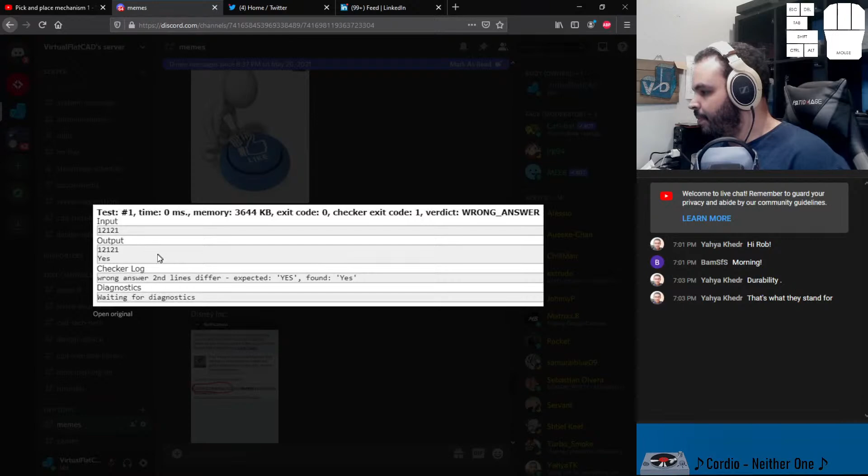When you're checking your code with an online compiler: wrong answer, second lines differ, expected yes, found yes.

Oh man, me posted a random Mickey Mouse video. Ooh, very dangerous - Disney Inc. has blocked your video in 45 countries. I think that's probably the kindest thing they could have done to you. Disney is just one of those properties that are very adamant about trying to protect their content, even though fair use exists. Also Nintendo - Nintendo's very like that as well.

When smartphone user sees a PC. Yeah, just poke the mouse, just tap the mouse.

Back in '09: when you're starting out I suggest you get an 80 gig hard drive, it should last you many years. Bro, what a meme. Oh, what a meme.

Me watching at 144p, what videos are coming out that are, what is that, 4320p? I actually don't mind 480p a lot. Yeah, sometimes it just loads faster, depends on your internet. Ha, nice.

Oh god, that is a wall of text. Alright, we'll see this one.

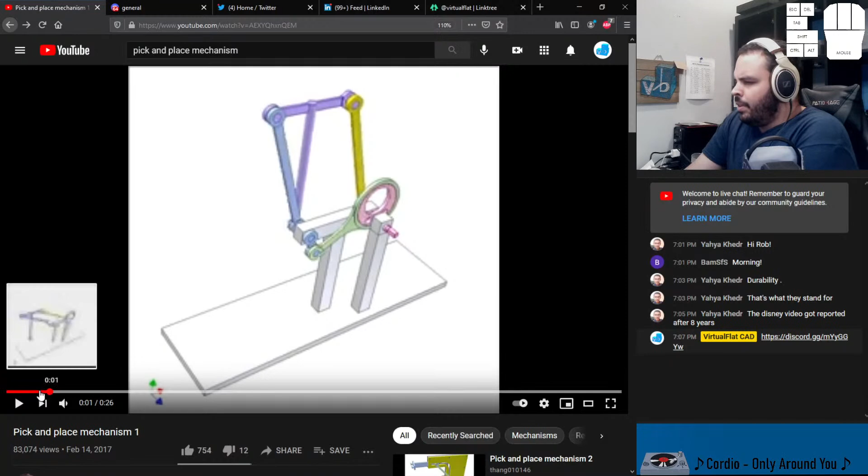But yeah, other than that, let's get started. So let's see, I want to take a screenshot of this. Maybe I'll do it just like this, and I can just do my Control Shift S or Windows Shift S shortcut to grab that. I'm going to start with that base there.

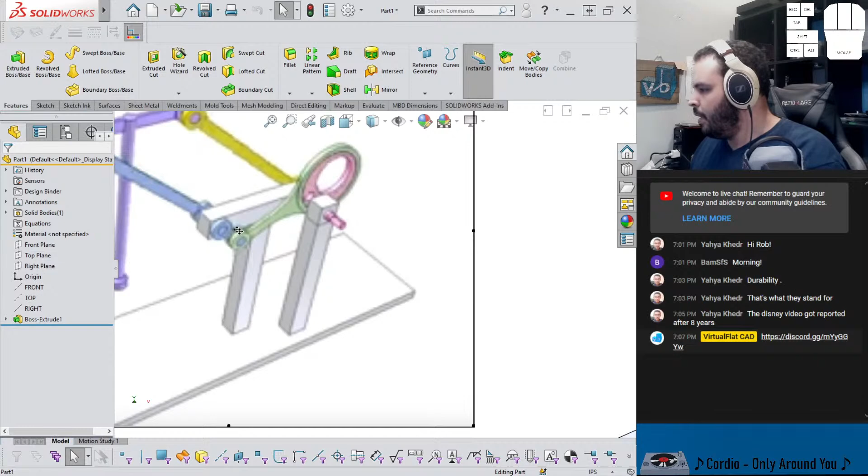Let's paste my little screenshot. So I see that there is this kind of T shape that I guess holds - it's actually the fourth bar. So there's a 4-bar mechanism here. If you haven't noticed, if I go markup, 1, 2, 3, 4, 4-bar mechanism, and this T is the ground link. So that's important to note.

The color coding is very helpful, so that I can assume is keyed to this, and it certainly does seem that way in the video. This pink member here, this pink eccentric, isn't connected to the yellow, which is why I suspect it gets two different colors. So really, it's this pink one that rotates, which moves this con rod, this connecting rod - you can call it a con rod - which then drives the blue member. The blue member then, by virtue of being connected in a series in this 4-bar mechanism, will oscillate back and forth, and then this thing out here is just basically a detail.

You could put like a robot gripper there. I might do something similar to what he has on there, where it's just, I guess that's like a suction cup or something, or just really general. Alright, so let's grab maybe, what do I want to grab?

Let me get out of markup. That'll do it. Front plane. There we go. Melektrika just showed up.

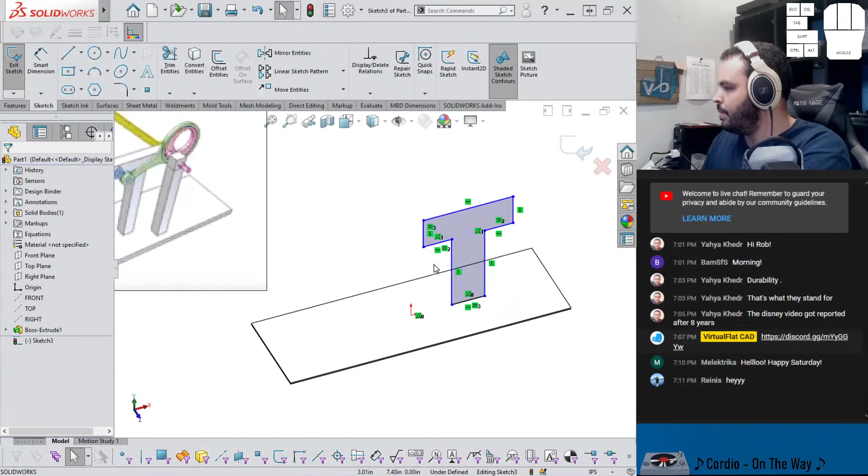Happy Saturday. Happy Saturday indeed. It's the weekend, guys. Anyone doing anything special this weekend? I don't know about you guys, but where I live in the United States, things seem to be getting back to normal. Knock on wood. This thing's made of wood. All right, I'm knocking on it. Knock on wood. But yeah, I see people going out a little bit more, and we're just having a lot less cases. I think might be turning a corner. Who knows? It's very exciting.

Hey Reinis, what's going on? Glad to have you here. Make yourself at home while I figure out.

We're doing a pick and place mechanism for today. This thing is from the Thang010146 YouTube channel. And the dimensions aren't critical here.

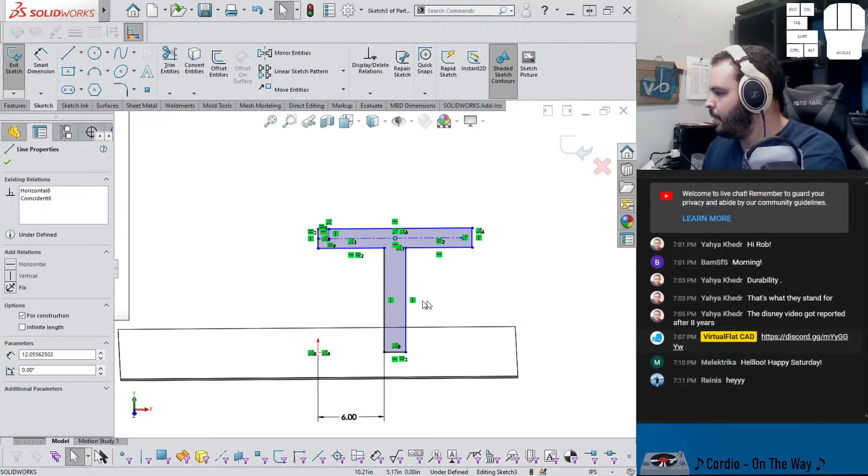Although it might be helpful for me to maybe grab a couple global variables or something like that. I think that'd be helpful. Let's do that, just getting some center lines. Say that those are equal. Maybe it'll say select midpoint, at the midpoint of that, vertical, and then I can set this. Oh, interesting, alright, looks like that got derived by virtue of this, which is totally okay.

Reinis is saying, I'm just struggling making my course homework robotic arm with motion analysis, where it places an object from one platform to another, and after that need to calculate torque of motors. How are you? Oh, so it was you who was talking about the pick and place. Yeah, it's because of you that I'm doing this, which I think is pretty fun. I'm doing pretty well, Reinis, thanks for asking. Yeah, just doing the model of the day.

And yeah, I think things will be pretty good here. So I think I want to define it by the overall throw. So what else? So I guess this just has to be tall enough. Oh, I might have to adjust this because based on the throw of this parallelogram sort of mechanism, yeah, you don't want this to dip into the floor. But we have Solidworks, so we can find out.

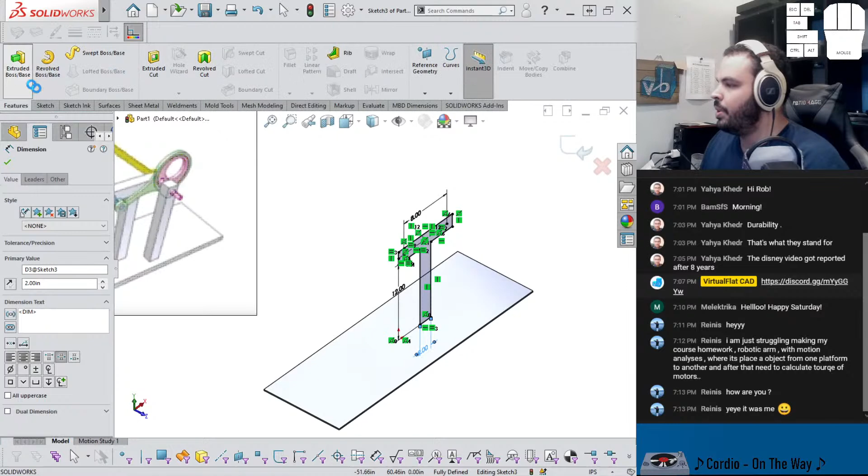Yeah, we can easily find out if it's doing something we don't like, and we just adjust. It's a nice thing about being an engineer of the 21st century. It's like all of these...

It's easily derived, so we can do something like that. We'll merge. Additionally, it looks like there's a space for this to oscillate, and then there is yet another member.

So what I might do is just kind of sketch on there, grab a corner, and say that those are equal. Do that, say that these are collinear and equal. And then if I just say that this is 2, that should fully define it.

There we go. Boss extrude up to surface. Looks like that fits perfectly there. That's awesome. Honestly, that's coincidence, I just kind of guessed to put it there. Honestly, yeah, and here it has a little bit of extra space, so a couple things we can do.

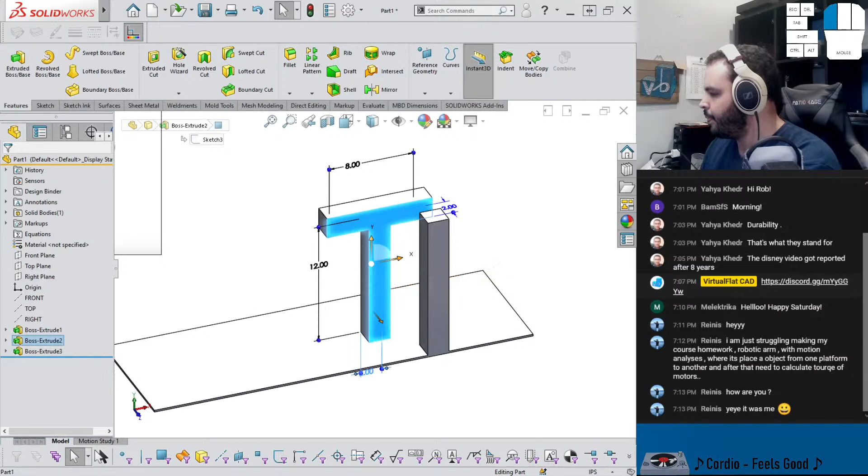So actually, a smart thing to do is say that instead of this just being 2, I could say that this equals the 2 from down here, because I do want them to be equal. And instead I can say that this is 1.5, and if I hit rebuild, everything should update, except I missed one. The thickness of this, I could say that this equals the 1.5 from down here. Hit OK, rebuild, and now everything's pretty functional.

Awesome sauce. Let's put it in here. This is the base, I will call it. Let's show the sketch from right here.

I'll get a hole wizard. I want a regular hole. I'll drill sizes, maybe a 1/2 inch hole, 0.5. There we go. We want up to next positions, this face please. You can put 2.

Control 8 to bring our focus. Oh, I kind of goofed up, didn't I? I'd like the hole to be over here too. Darn. Alright, so let me just hit OK on that, and I wonder if I can just grab the point sketch, edit sketch plane, and say it's for this one.

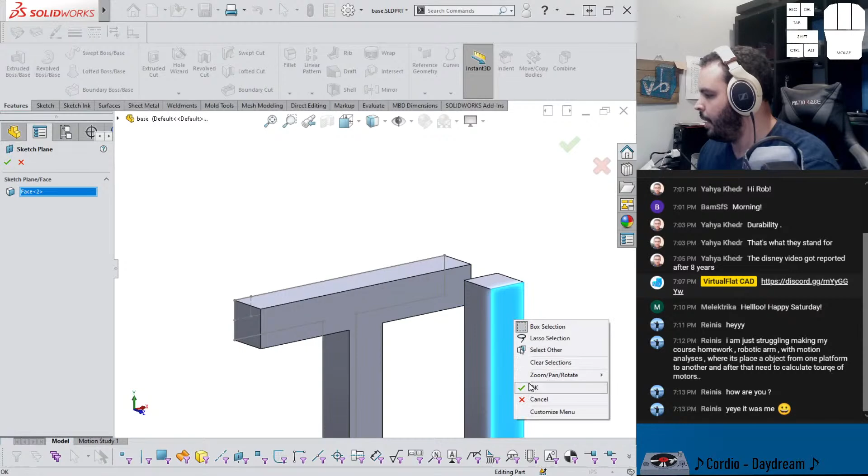Okay, so that did work. So instead of up to next, I should say just through all, and that should get both sides of the body. So it'll look something like that.

Yeah, furthermore, I could even put some fillets, make some distinguishing features, why not? So we could say that this equals... no, you know, I might just give this a random value and just do it from Instant 3D.

So fillet, I double click on that. Now I could say that this equals, click on that, the 1.5, but that's a diameter, so we have to say over 2, and rebuild. Oh joy, looks like we're doing pretty well with that one.

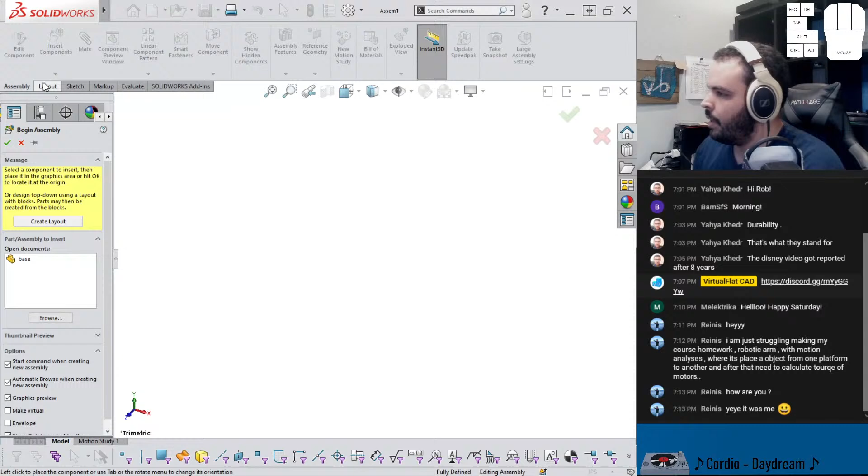All right, so I think next step, we got to get this into an assembly, and then we can continue working. So base, hit the green check. Green check means that places the part at the origin of the part with the origin of the assembly. Typically best practice, so that you don't have your origin in a weird place when you start your assembly.

We can dismiss the sketch by hiding it, and that looks pretty good. Let me see if I can paste the same picture. This, there it is. Yay.

So what can be next? Can be any sort of things. This has a pretty interesting design. I'm not sure if this circle in here is just a weight saving feature or maybe a balancing thing. It's probably what it is, so this shaft isn't so lopsided. Very interesting, and I assume this is the continuation of this shaft over here.

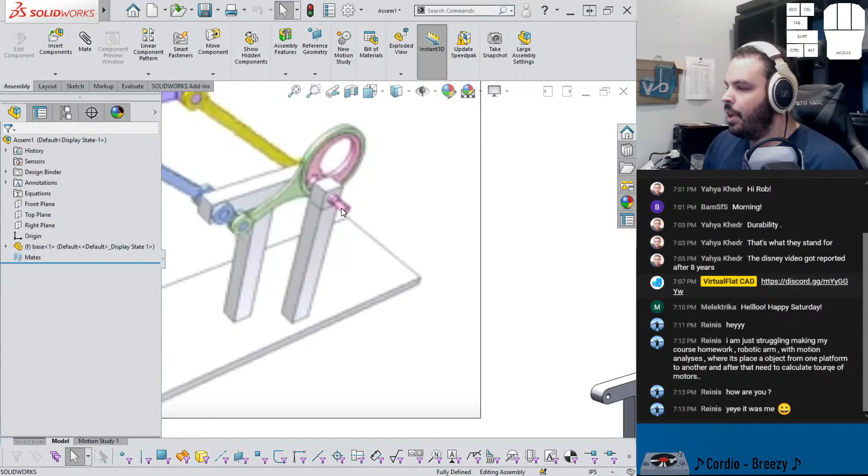So I think the next thing I'll go for is this crankshaft over here with a lobe on it, the eccentric. So, new part. Yeah, let's not overthink it, let's get a circle off center. Give it a relation, set its eccentricity, maybe 1.5.

And do I want from here to here? Let's just set an overall diameter, 4. I can extrude this. Yeah, let's just leave it blind, 375, maybe going the other way. We should have a good bit of space to work with, so I'm not too worried.

Additionally, let's get a smaller circle to represent the shaft. I think I'll put 1/2 inch holes, 0.5 sounds a good deal. And I'm not going to go for mid-plane, I'm going to go blind in one direction, and give it some length, and then 2, give it some length that is longer. Maybe longer still, something like that.

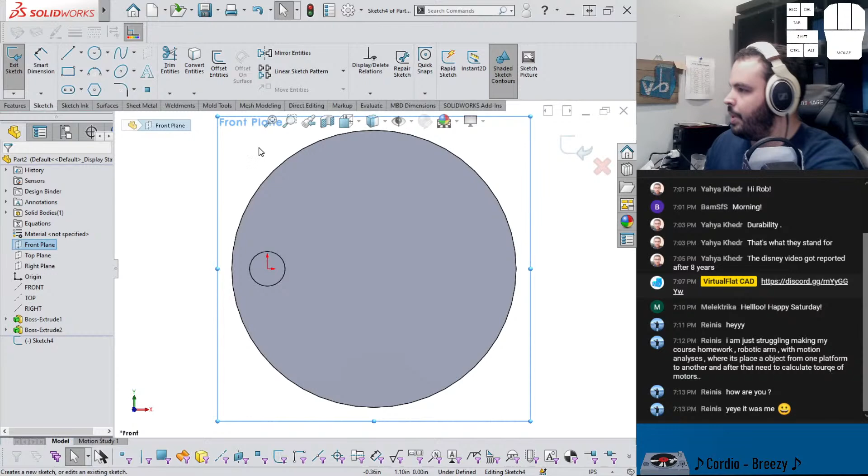And then I can apply the weight saving feature. Yeah, you know what I'm very interested in seeing? Here, I'll show you in a sec once I figure out where I want to put this. So maybe something like this, kind of a center finding. Oops, I fixed them, that was a doofus move of mine. Right, let's just put that right there.

Yeah, that should really be... sir, can you come out? Come out, there we go. Okay, so I could say that this and this should be coincident. There we go. Get something like that. 2.75. Excuse me.

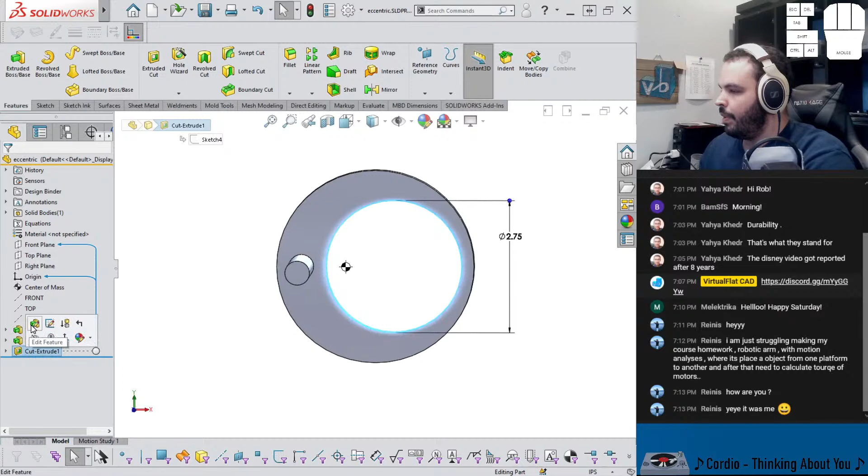Alright, so what I'm very interested in seeing - I'm going to call this the Eccentric. What's pretty cool is reference geometry, we can say center of mass, and let's have the center of mass always showing. Remember, the torque is about this shaft here, and the center of mass is over here, so it has to work to bring this about the center, but with the balancing feature, it brings it a little bit closer. I wonder if I can make that even better still. Ideally, if you can bring that center of mass directly in the center, that would mean it's completely balanced and you wouldn't have any vibration issues or anything like that.

Hey Dhaval, what's going on? Good to see you here, man. Hope everything's going well for you.

And then I can make the... do that, that's a bit extreme. Oh my gosh, that is so skinny. Let's make this 3. Yeah, it's a cool feature to mess around with, but I'll leave it like that.

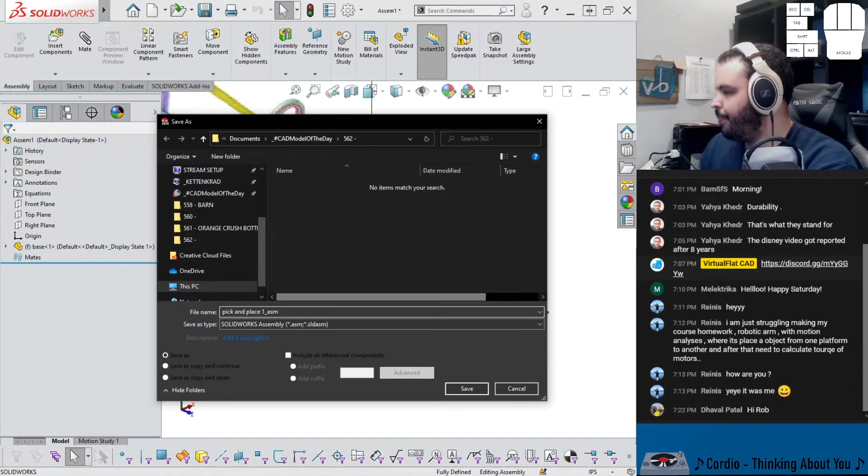Let's get it into our assembly, which is not saved for some reason. So we'll call this pick and place 1 ASM. I'm going to insert the eccentric like there, so we can just put that with that, concentric. And to get this directly in the center, you can use your advanced mate, the width. If you pick the 4 faces just like that, the width mate will come up, and you'll be able to just pick it like that. Now we should have an eccentric that we can, eventually, be driving at the very end. But yeah, I think this looks pretty swell.

Next is this con rod. I think what's going to be important here is the length, so I'll make sure when I model that, I'll include a parameter for the overall length of it. But I think this is going well so far - don't want to jinx myself, but...

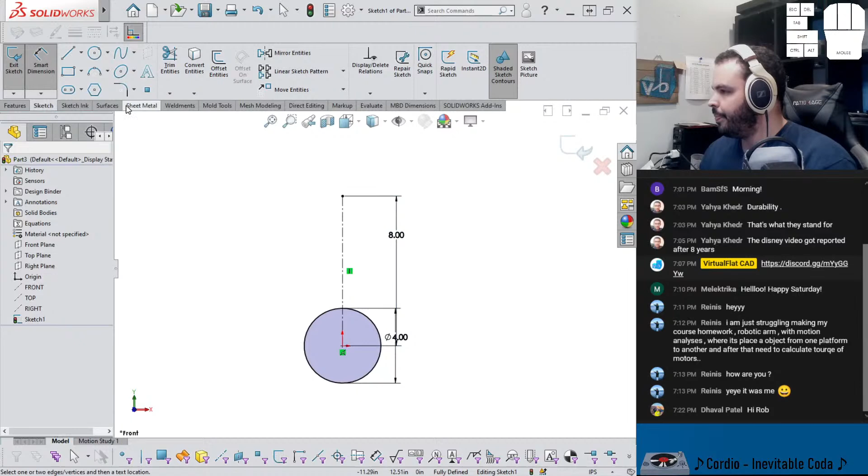So this 4 represents the eccentric that will go in there. I'll get a center line - this is going to be the effective length of the connecting rod, like that, and I'll just put 8. I may or may not have to adjust it, we'll see. Yeah, but this needs some thickness, so put that just like that. Let's say that this is 0.5, and maybe this is 1.

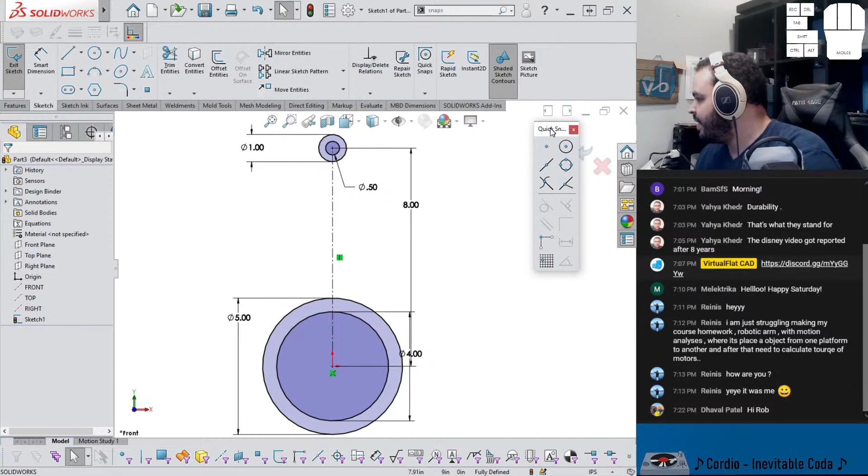So it looks like we're tending towards a multi-contour sketch, it would seem, which is totally cool. Stop it with the tangent. Snaps, quick snaps, we do not... oh, where'd it go? Why is it here? Oh no, wow, that was the longest snap I think I've ever done. We don't want quadrant snap, or what I might just do - sometimes that quadrant snap can be a little bit annoying, but I'll hold down control, which just disables all the snaps, and that way I can just place them on my own. So that's a nice tip: holding down control is a temporary disable, so as soon as you let go, it wants to snap again. And then we can do something like this - maybe less than that.

I hear something's chirping outside my door. Hopefully it stops, or outside somewhere.

Hey Alessio, what's going on? Good to hear from you.

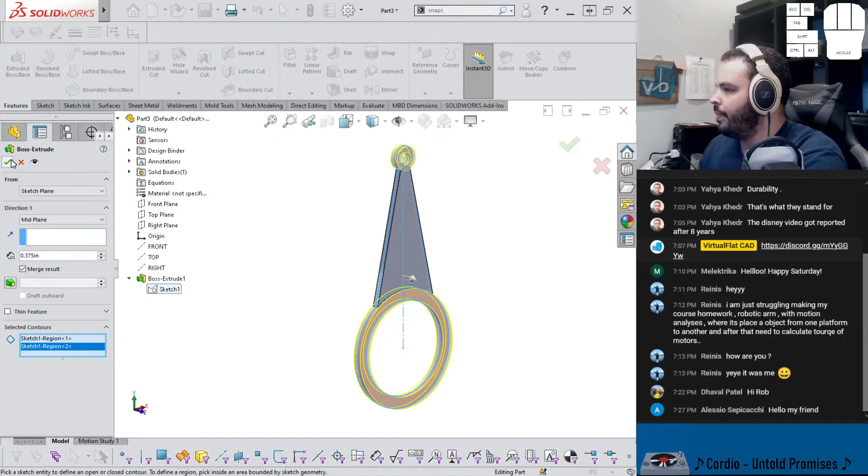So we can extrude, we can bring this. It's not going to like it unless we just kind of select that. Turn off thin feature, don't like how that turned on. I'll make that a certain thickness, which is okay. Then I'll run the command again, pick the same sketch, selected contours. Let's get these internal regions here, and 375, which I believe is the same thickness as our eccentric.

Conrod. Yeah, his looks better. I might make mine a little bit closer to what he has, but it works - if it works, it works.

I wonder if I can put a hinge. Let's use what we learned from last time - advanced mates, no, mechanical, hinge. So the concentric selections are this - whoops, I gotta be careful - and this. Coincident are this and this. Oh, that is so cool. Then I don't need any angle limits, so I can just leave it like that. Wow, that is very cool, I'm going to be using that more often from now on. Because before I would just do edge to edge, and mating edges is typically not recommended because it can be easily destroyed by fillets or chamfers or whatever stuff you want to apply to your part file.

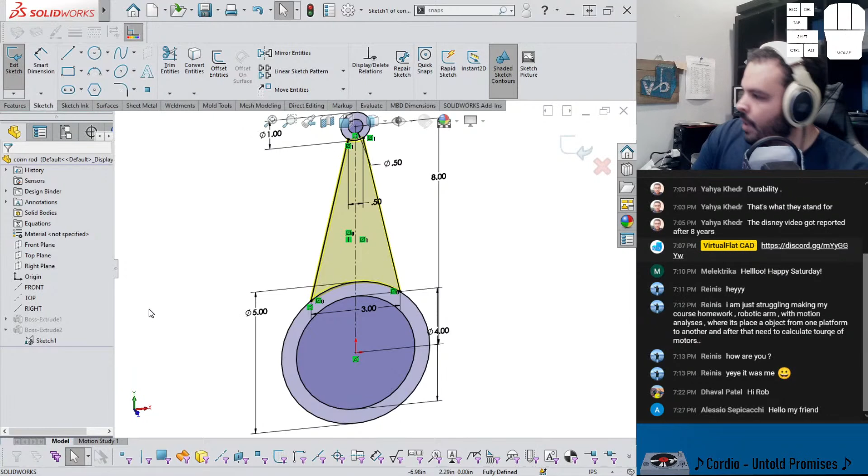Here, let me make this look less like garbage - like Garbo. I might just turn these construction.

Get a tangent like that. You can see this and this tangent. Maybe specify that as 2, and that's enough for it to fully define, and then I can mirror.

It's probably going to throw an error, and it actually didn't. Alright, so that's good news. But if it did throw an error, it means that the feature got confused of the contours. What I would do if it threw an error is go into here and make sure that the regions selected are the ones you want. But that's looking pretty good.

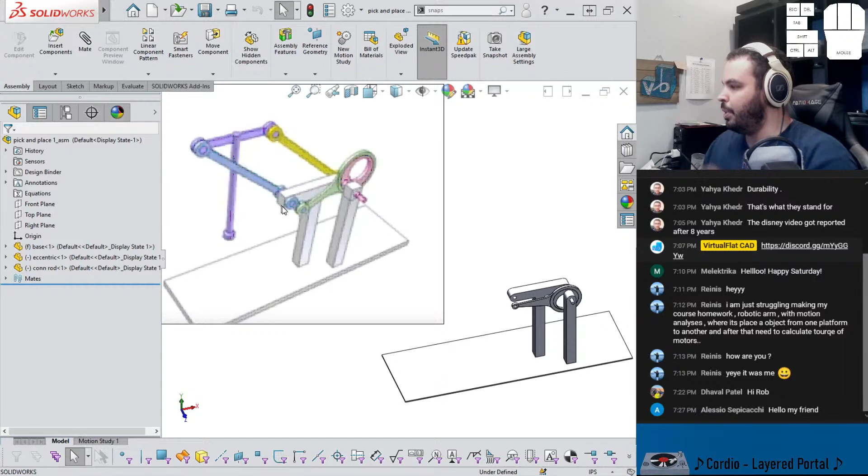Alright, so I think the next one we should definitely work on, what's going to be very important here, this blue one. And then we could even test the mechanism to see if it has the character of the motion that we want. And if not, we'll work on it until it is.

So what I think is important here, there's a small link right here and then this longer link. Maybe I'll make this longer link 12 or 16 inches and this small one maybe 2. Not really sure yet, but we'll get started.

So what I will do is grab the front plane, and this is going to be that shaft that goes through, so that's going to be 0.5. We're going to extrude that mid plane 1.5, so that's the thickness of basically that T shape that we made.

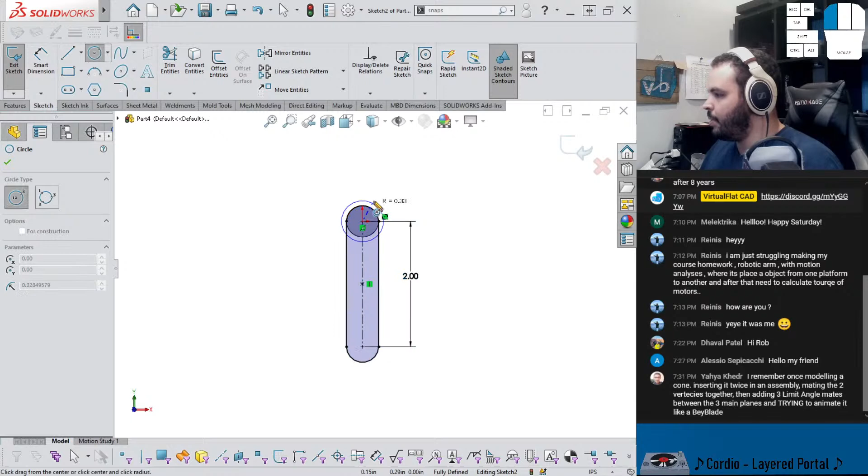And from here we can sketch on the faces that it makes to make the actual rods here. So this will be the short one here. I'll say that this is 2. And again, these might have to be adjusted. Who knows? We'll go with the flow.

Yahya saying, I remember once modeling a cone, inserting it twice in assembly, mating the 2 vertices together, and then adding 3 limit angle mates between the 3 main planes, and trying to animate it like a Beyblade. That's actually very cool, that's very clever, I feel like it's something I would have tried. Oh man, Beyblades, that brings me back. Let them rip, but very clever, I like that. Maybe we can do that as a future model of the day.

So this shape will extrude. It's going to get confused with the contours, but that's okay. Maybe we don't want it that thick, so 0.25. Let's try that. Looks pretty good.

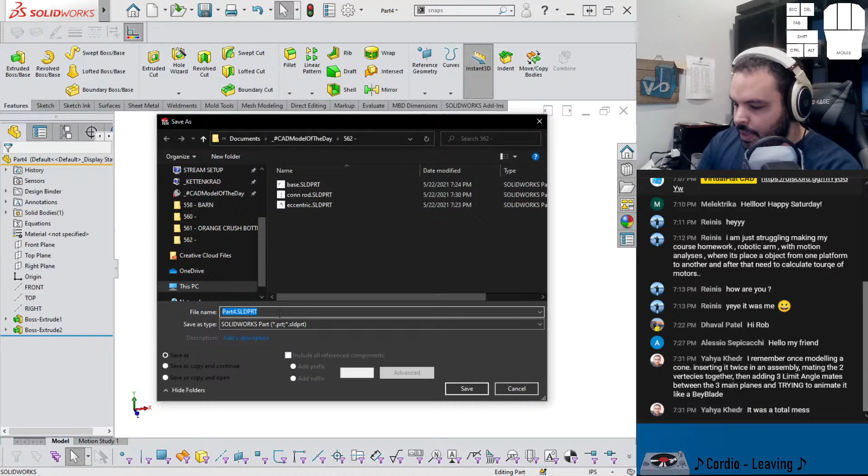And even though this is not finished, I'm going to still insert this into my assembly to see if we have the kind of character that we need from this. So driving member, let's put it here and see how to connect this to this.

I think again I'm going to use a hinge. So mechanical mates, hinge. So the concentrics are this and that. The coincident are this and this face, which I know will for a fact exist. Yeah, I don't want to select this one because I'm going to attach something to it.

Alright, very good. So now this needs to connect here somehow. And I think I could just do that with like a thing sticking out, a boss to just retain that.

Hey bro, you want to go like down here? There we go. Bro. Easy, easy.

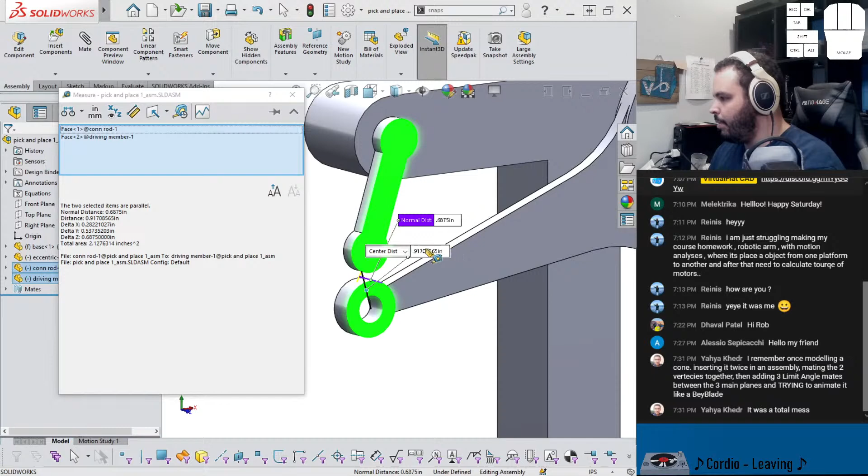Alright, anyway, if I grab that and find out the distance, 0.6875, I can copy that, bring this, go back into here, like that, 0.5.

Yeah, but the Beyblade idea is very, very cool. Do you know if you're going to go attempt it again? Because I think people would really love to see that.

And then this just simply needs a coincidence. So let's see if I can... Oh, so that is the... Yeah, that's exactly what we need. We need this to be swinging back and forth. It's not swinging as much as in Thang's video.

And actually, if I... Yeah, so it does seem to be swinging symmetrically. I might just have to make the connecting rod longer. And let me look at the video again. Oh, this was from last time.

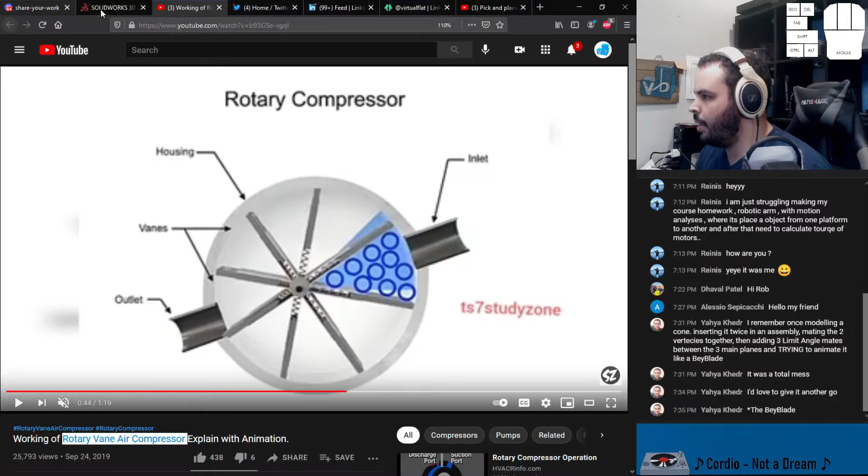So yeah, it almost goes to the change point. So the connecting rod needs to be longer. So let's go here. Instead of 8, let's say like 9. Okay, and 9 is too long, it would appear.

And actually, it's like changing where the center is. It could be that I need to make the eccentric smaller. I'd rather not, I might change the size of the T. So instead of being 8, change that to 9.

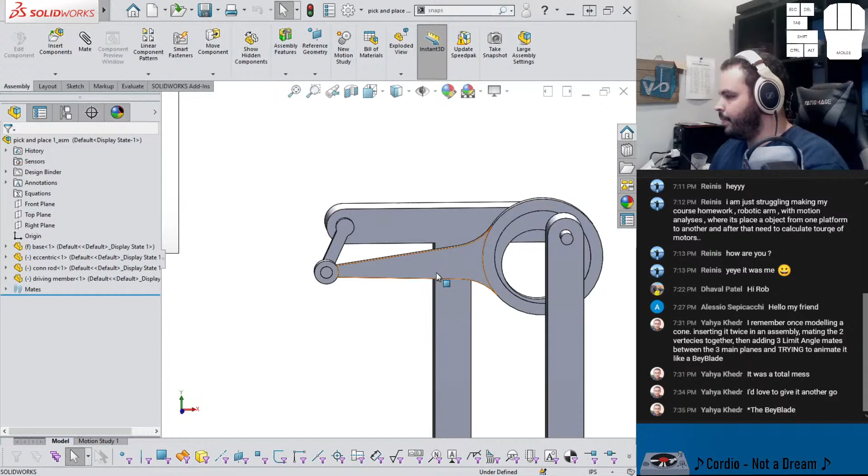All right, I think this is looking so far so good. So I can actually continue with this. Sketch on the other face here. We can convert the entity and just bring that to close.

And bring this like way up like that. And I'm going to say that that is co-radial. There we go. And this is another important dimension here, the overall length of the driving member.

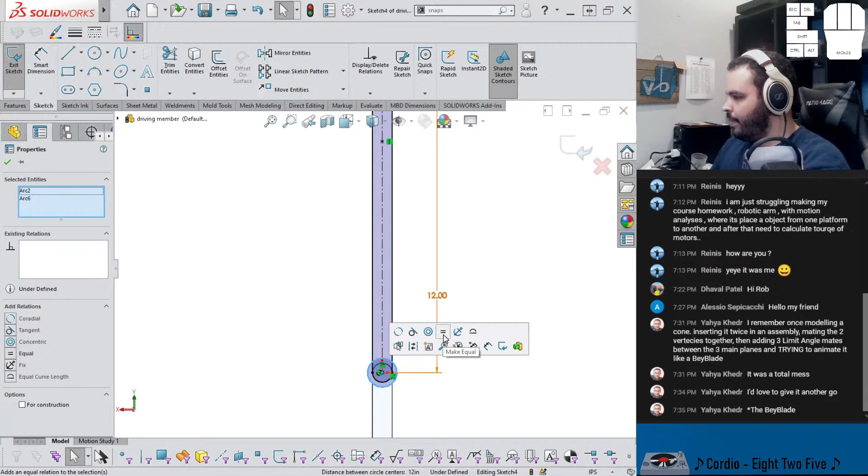Extrude selected contours. Yeah, let's just pick everything, and let me select this. There we go. 0.25. That's how it looks. Pretty cool, I think.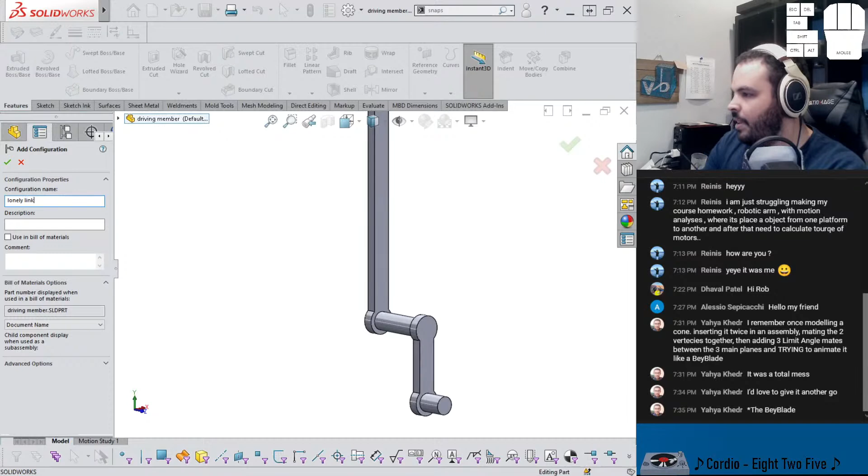So we're gonna need another one of these with the same length, but I think maybe the easiest way to do it is just derive it from this. Lonely link, lone link. The easiest way of doing that, I mean, it'll give me a goofy origin location, but that's okay. It's not going to matter too much here.

Let me get my surfaces. Can I cut with a face? That'd be kind of dope. No, let me go to split, grab this face, cut part, specify that for consume. Like that, so we should have the default and then the lonely link, which is guaranteed to be the same length because it comes from the same body.

Kind of cool. Also, don't have to save another part file out, so I can just copy that. So let's just say that this is the lonely link configuration, and that's the story.

Again, gonna use my new favorite toy now that Yaya has pointed this out to me. There we go, and then this with that. Oh man, it just sticks right there. Good stuff, good stuff.

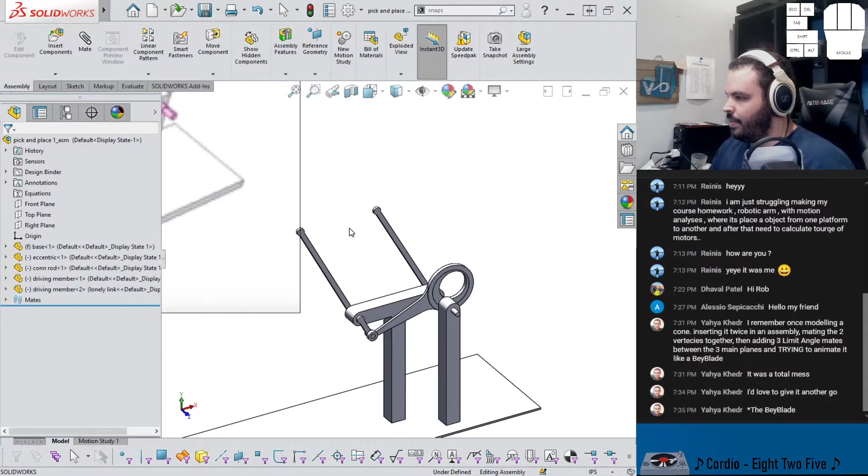So the last thing we need to do is the pick itself. Yeah, I'm like looking at this. His linkages look a lot thicker than what mine are, but I guess that's an artistic decision, I will say. AKA, I'm just too lazy to change it. Let me get a new file for this one, I think.

I'm gonna sketch like a dog bone like I did the other time. So with that, I think that's 0.5. This needs to be the same as the length of the T, basically. So 8.5, I believe it was. See that those are equal. 1.

So let's give this a mid-plane, like that. 0.5. We're going to make this kind of thick, and we're making this kind of thick, so I'll call this the pick.

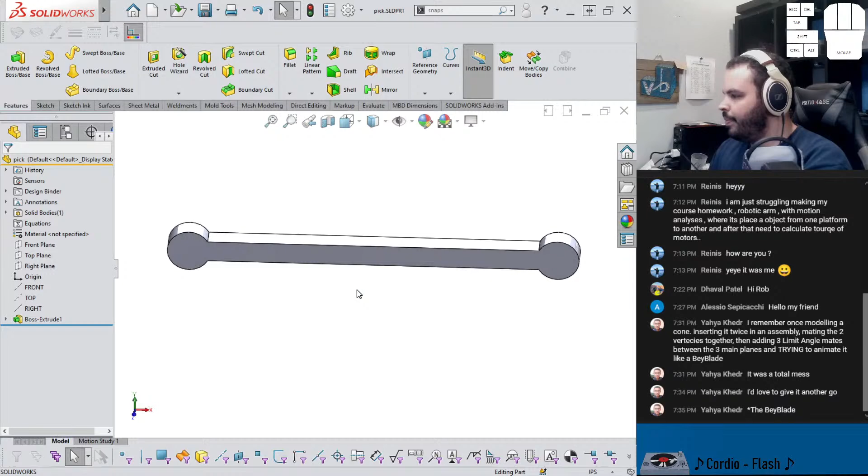So with that, I can actually make the little plunger pick thing that he shows there. Can do that fairly easily like this, I would think. 1.5. And...

An overall length - well, I'll do it from the origin if I can grab it. There it is. So that length, let's just put 10. So that's going to be a radius because I'm going to revolve this. 0.5. And there we go.

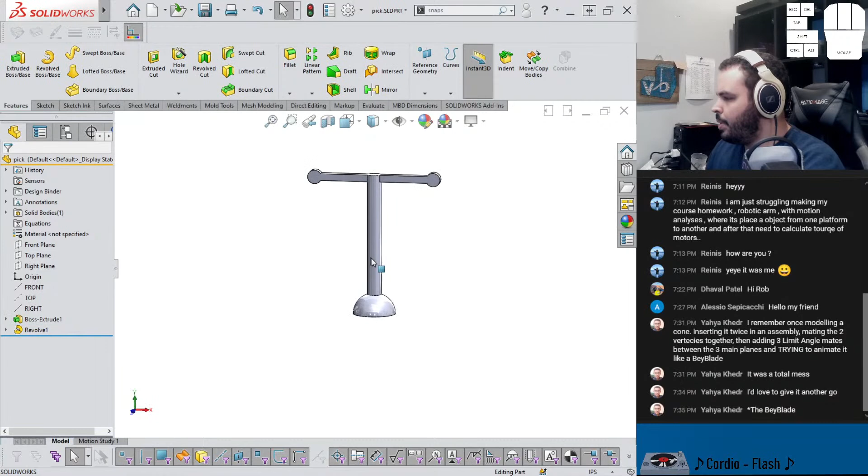Revolve that around there. We can merge. I feel like that is too big. That's better.

All right. I get myself adjusted. Insert.

Yeah, that pick does not look nearly long enough. Probably gonna have to play around with that.

Honestly, this stream should just be called Rob is obsessed with the hinge mate for an hour.

And then this just needs to be a regular, like concentric, because anything more would be kind of redundant. Man, that is so cool.

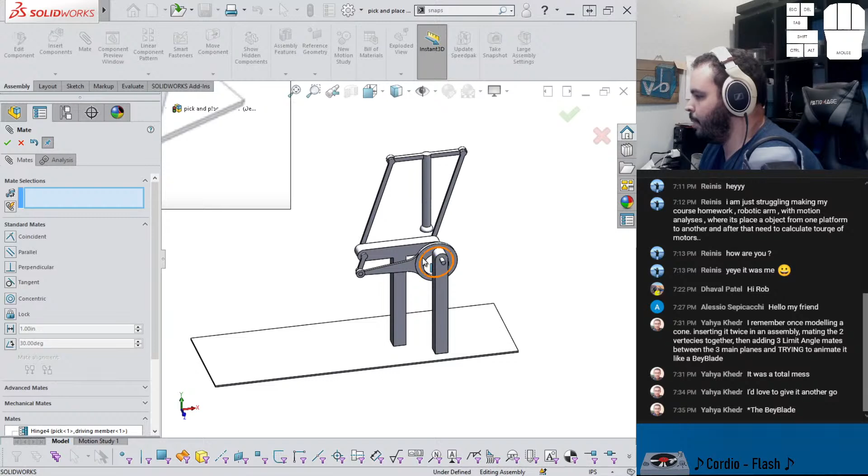So I think I can make the motion study, but I think I'll tune it up a little bit. You know that, oop, I'm still in the mate tool. Yeah, so I don't really need all of this.

Yeah, I can trim this, why not? I really should have just, I was kind of like almost doing my best to just make it, you know, just like his, but you know, I got my own thing. That's okay, and because it's fixed.

The assembly, if you ever want to restore it, it's also an option. So we have this midpoint, this 14. Extrude through all both, flip side to cut. So we have like a more compact version of it. Can get rid of that.

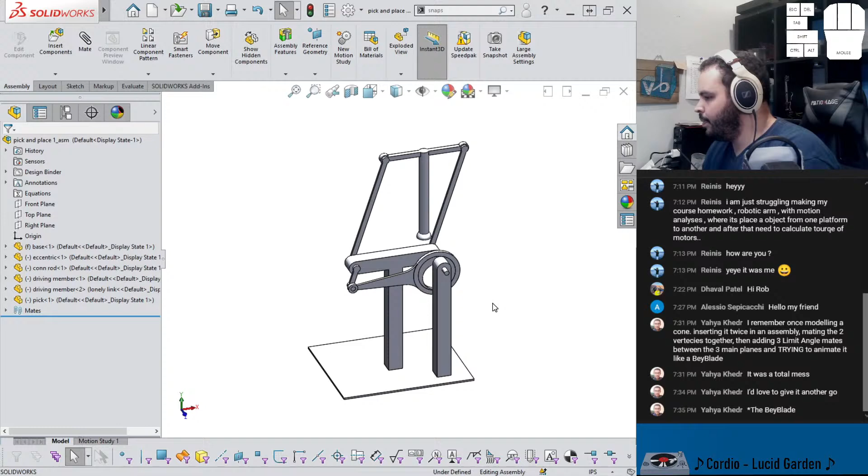Let's bring that into a motion study. Oh, and I actually should have its initial position, you know, around its inflection point. Yeah, there's a couple of intersections that I'd like to fix actually.

Hello? Why is it making noise? Oh, it was just playing mechanisms. Wow, it just went through all the pick and place ones. Man, that startled me. It's like, what is that? That really got me off guard. I don't know about you guys.

So what I'm noticing here, and I'm sure you guys notice it too, is that it really sinks a lot deeper to pick up rather than to place, which could be helpful for something like, you want to pick something up here and place it on a conveyor belt that's higher.

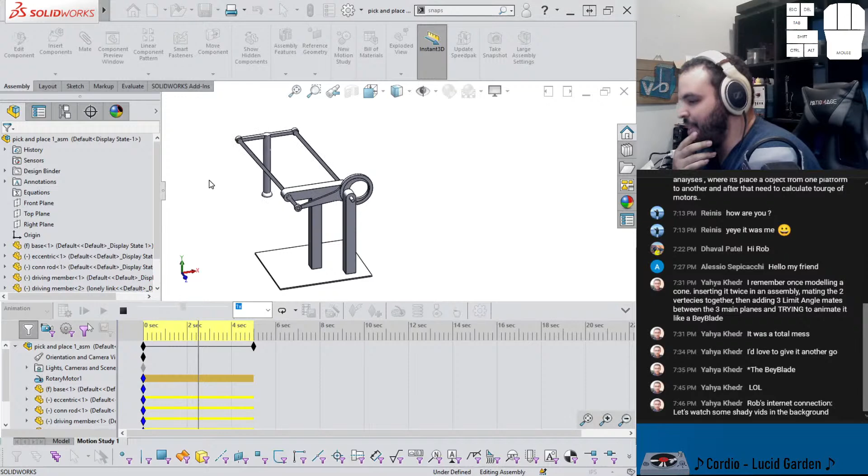Let's watch some shady vids in the background. Yikes! Yeah, if I left it long enough, we would have gone to the Finger Family videos. I don't know if you know about those, but that is a very suspect part of YouTube.

I'm gonna see if I can even this out, and I have a hunch that it's just because it's not actuating this evenly. So if we think about it, at its peak right there, it is the eccentricity, which I already forget. The eccentricity of this member here, which is 1.5, plus the length of the connecting rod.

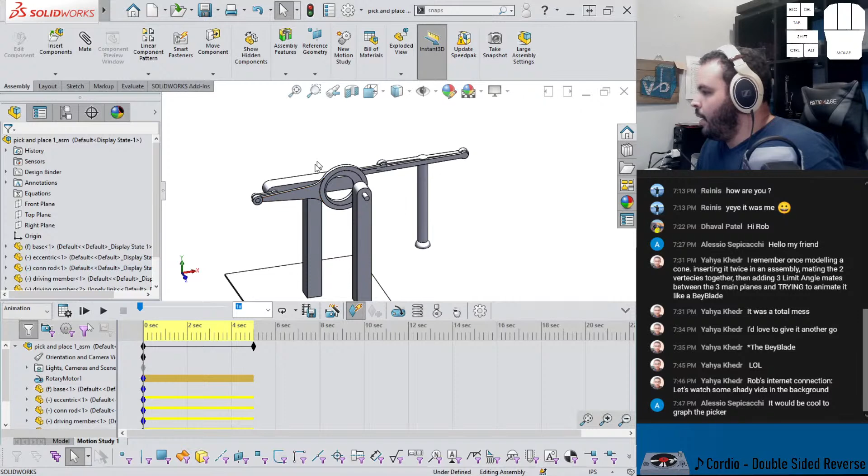Yeah, let me gonna write some notes down to graph the picker. Oh yeah, we could add a trace path. So the eccentricity is 1.5, and the overall con rod is 9. Which means at its maximum stroke, it would be 10.5, and at its minima, it would be 7.5.

I think what that implies is that this should just be the average of that. But of that, of course, it's 9, I believe. Yes, update. That's much better.

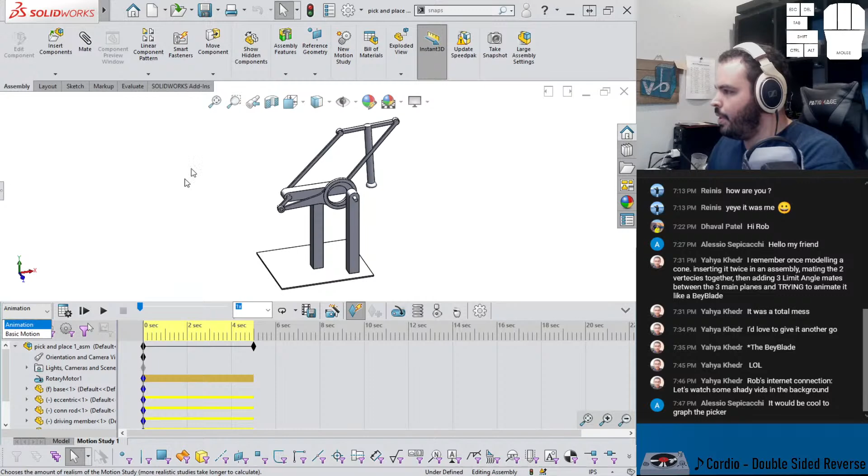So I like this view. So let's do a couple of things. Let's save this view first. Save 1, okay. We're gonna change this view into something like that.

Oh yeah, because now I changed the length of the T but not the top, so that's why it is tilted like that. Now what was it gonna do? I'm just gonna replace this.

Add-ins. Why don't you use cameras? Because I don't want to. You can, similar amount of work I would think. For someone who has, I've used them before, and the thing is, it's just the same amount of setup. Setting up a camera is like saying, oh, it looks like this, and then prescribing a perspective view and stuff like that. I just want to be able to switch to them, which I can, just like that.

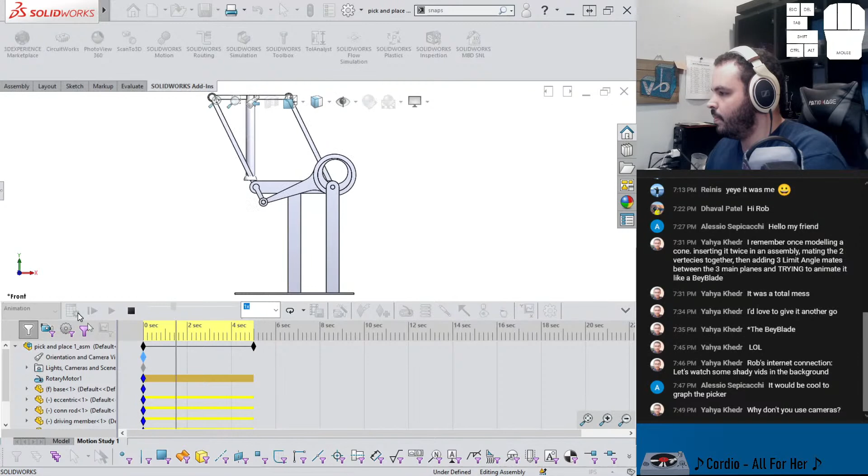Something like that. That is very cool.

So what I think I should do now, let's open this, get a point right at the bottom there, save, motion analysis. This should still be the same thing. Yep, don't. Alright, good to know. Hinges work in motion analysis. I would expect them to, but there are a couple mates that it doesn't work with. But we can do this.

Displacement, trace path. And we want the pick. Cameras are really helpful if the animation changes its views.

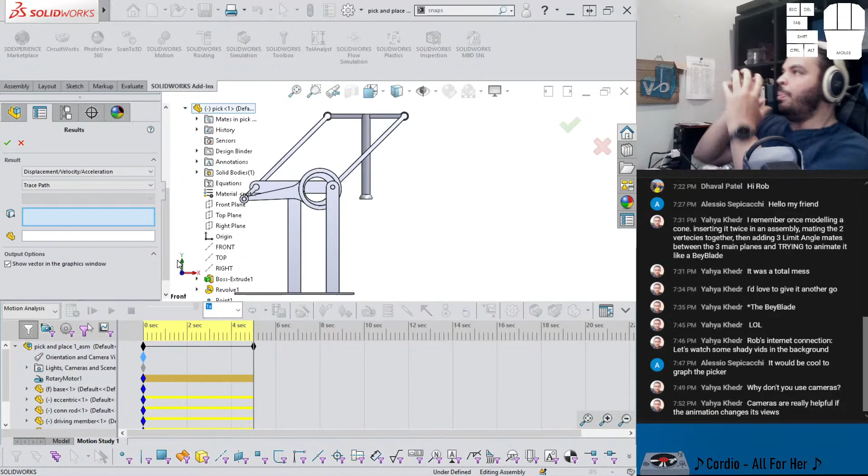I think I agree with that. If you know you're looking at it in the front view and in your animation, you like swoop the camera somewhere else, definitely you want to have a camera for that. But basically I already picked what the one view I want is. That's just going to be constant. I'm just looking at this to test it.

Yeah, it's very, very helpful. I mean, that's how I did the skateboarding one. Trace path. I need to pick Point1.

It's a little bit eccentric. You see that? And I know why that is. It's because the center of rotation of the eccentric is a little bit above where the center of rotation of this point is.

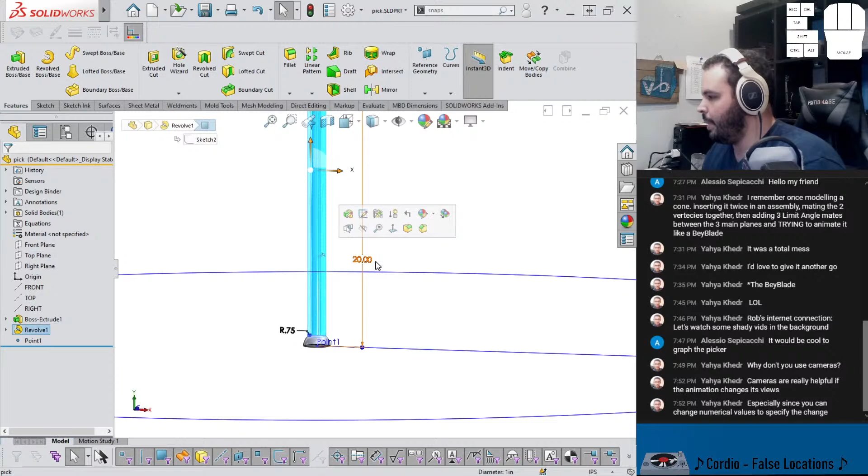That is pretty cool though. Sorry, I was just staring at it. I want to make this longer. Whoa, maybe not that long.

Very cool. I've even defined cameras using 3D sketches attached to my model, where the change in view is done by updating the 3D sketch as the model changes. I don't think I've tried anything like that.

You know, I've of course used splines and stuff like that. Let me see if I can find it real quick. This one, 295. Whoops, I did a no, but here, let me replay. So that's a camera just moving along the spline, basically, and it's also changing the zoom level. Yeah, so that's that goofy little thing.

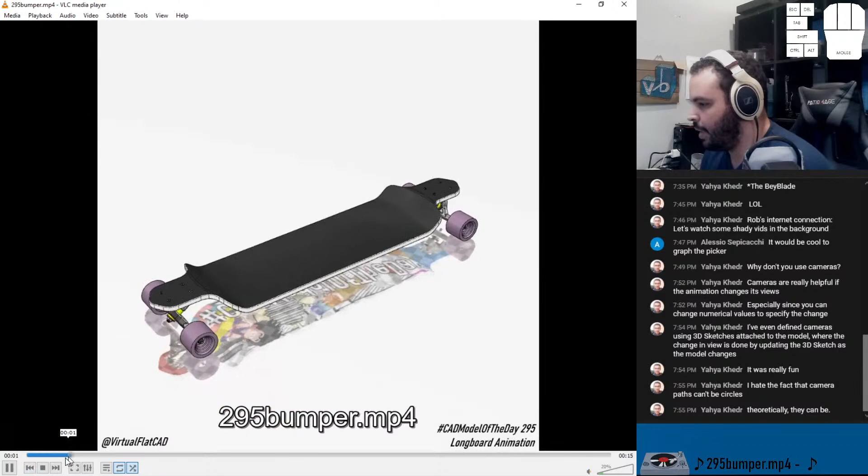I think they can be circles. I think that's how I've done some turntable. I mean, yeah, it's kind of goofy to set up. I do agree, because you do have to set it like 0%, 25, 50, 75, 100 if you want it to make a loop.

Let's put the music back on.

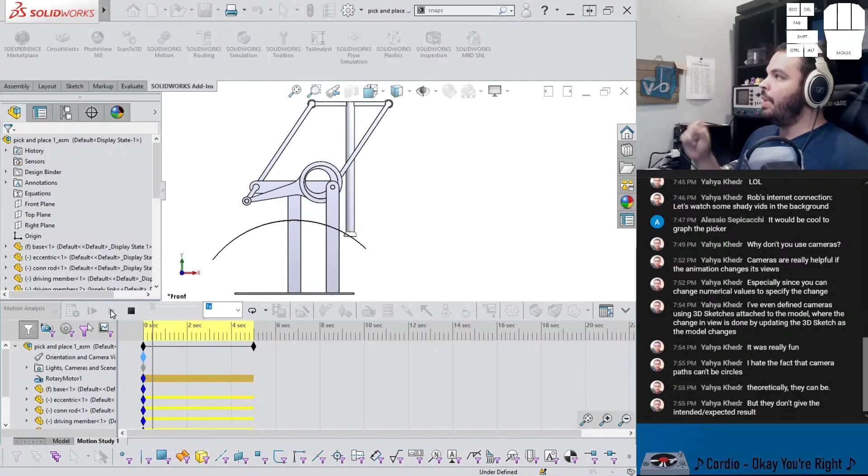Cameras are cool, but if the work I require is pretty simple, I usually don't even bother with them. What is helpful if you want perspective view in your animations is having a single camera that locks it, because if you turn on perspective view from here, you'll see that if your object changes its bounding box, the perspective changes too, which is annoying because it tries to fit it to the screen. So if you have perspective with your single view, definitely set up a camera is my recommendation. But other than that, just do whatever makes you feel comfortable.

Let's bring this down like an inch. We gotta update some positions. Now that is more in line with that. I would expect this curve to be more even, and it is.

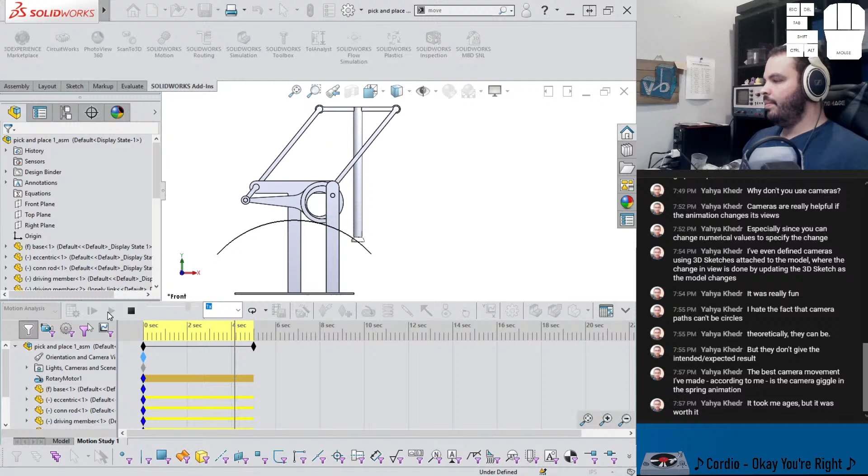That's very cool. We got this thing pretty tuned up, I would say.

Now let's do something. If I right click your assembly, you can check interference. I didn't see a window come up, so I'm a little scared. Check interference, is it behind this? Oh, it's way over here. Come on, there we go, don't be shy. Select parts to test. Can I just select all of them?

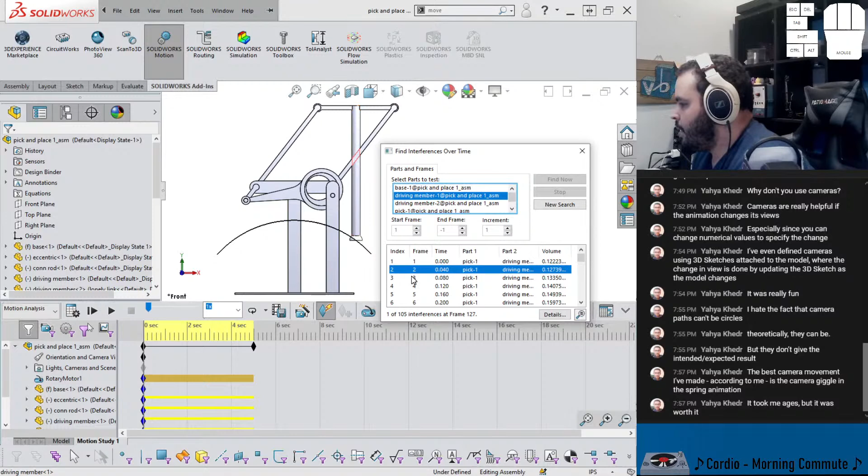So it looks like this is intersecting the linkages, so I'm gonna use a down arrow. Then it's the little suction cup thing with the base. I think I just need to make this a bit thicker is what I'm getting from this. And then there's a similar interference over here, you can see that red area, and that would appear to be it.

So let's go here and boss extrude. Let's just bump this up to like 1, make it extra thick, and get something like that. We gotta change the position.

Okay, still functions similarly. Let's check interference. Why is it appearing way over here? Come on, don't be shy. Oh my god, now it's long. Why are you long?

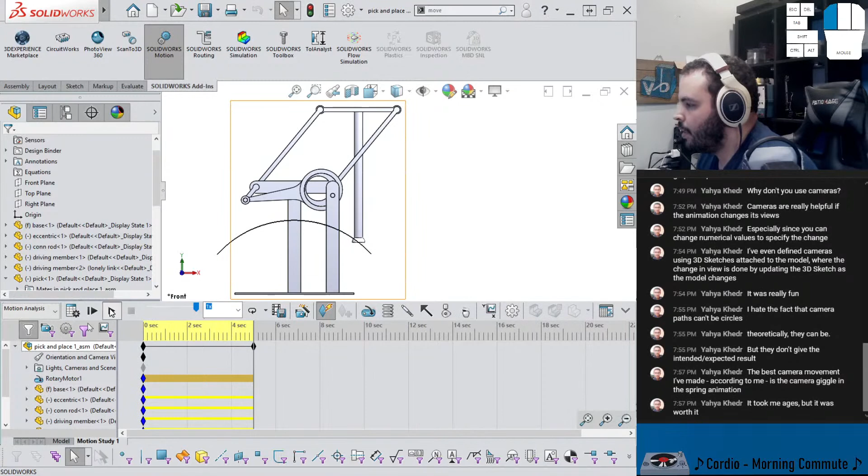Why not just do all of them? It doesn't like selecting all of them. That's interesting. New search, this and that. That's what I had before. 0 out of 0 interferences, so that's really good. It looks like we have resolved all of our interferences.

This thing is looking pretty good. And then now I can just go here and just pick one, replace.

Now I got a question, and this may not have an answer. This is not like one of those, oh, I have a question and you, the student, should answer it. Is there any way to change the color of the trace path? I've only ever gotten it to be black.

Change the initial position to be right at the end. Ah, sweet. I don't feel like making another part though, and it'd be kind of cheese sweep, because then I would have to draw that arc, which is not a problem for me.

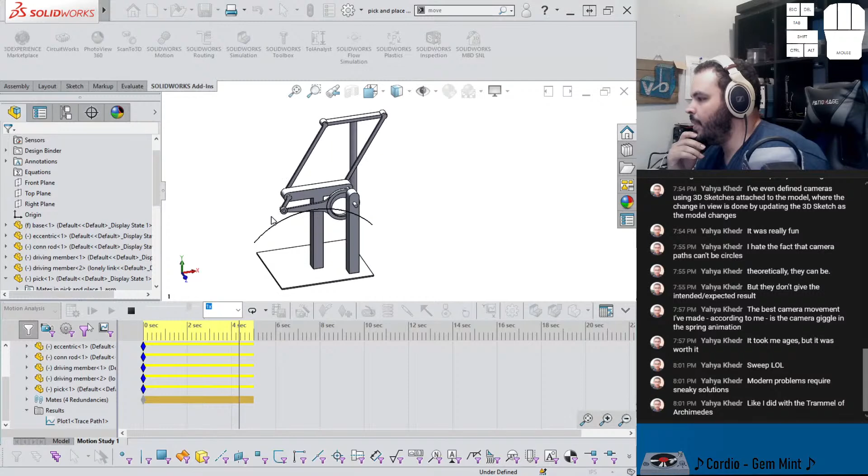But you did that by actually drawing an actual ellipse, a partial ellipse, that you rigged to a top-down assembly like relation, right?

Versus... I might just leave it out, honestly.

Sorry, I'm just staring at this thing. This thing is very cool.

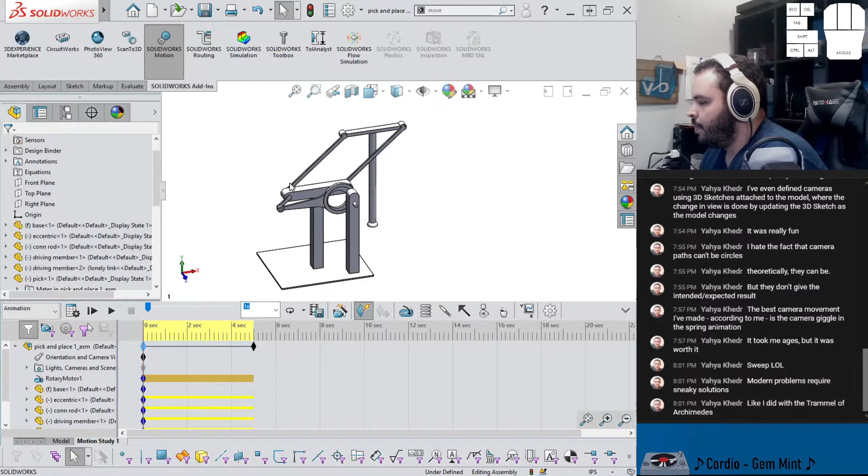What I'm thinking of doing though, is rotating the handle by 90-degree increments, adding points, and then drawing a partial ellipse between them.

Yeah, that's cool. I think I'll opt out of that though. Just gonna thicken these up, so I'm gonna take out this.

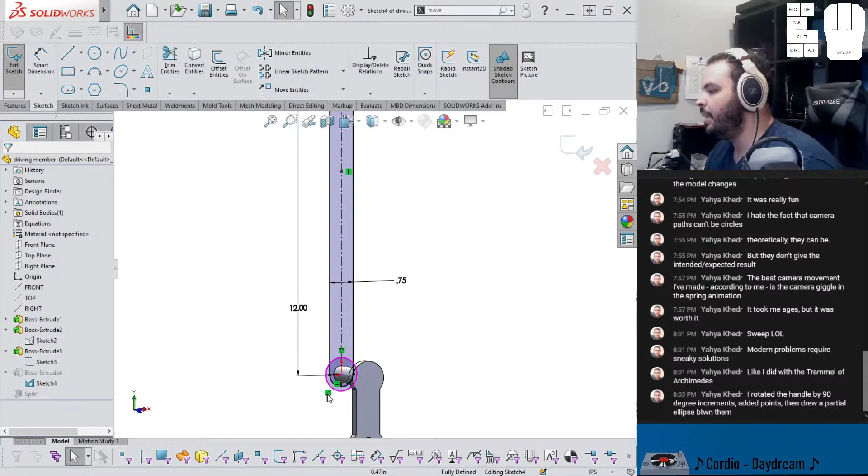Take that. It is very clever, but I was more looking for a solution that could be generalized to anything. Like if you think what I did for Pi Day, like the spirograph, you wouldn't be able to use that technique between that, and even if you could, that would be a lot of work.

Hey Taseen, what's going on? Good to see you. I'm getting pretty close to the end here, but you're here for like the finale.

Oh, that's much better, I like that. Yeah, we're making a pick and place mechanism.

What I might even do is actually show it from the other side. Let me thicken this up too.

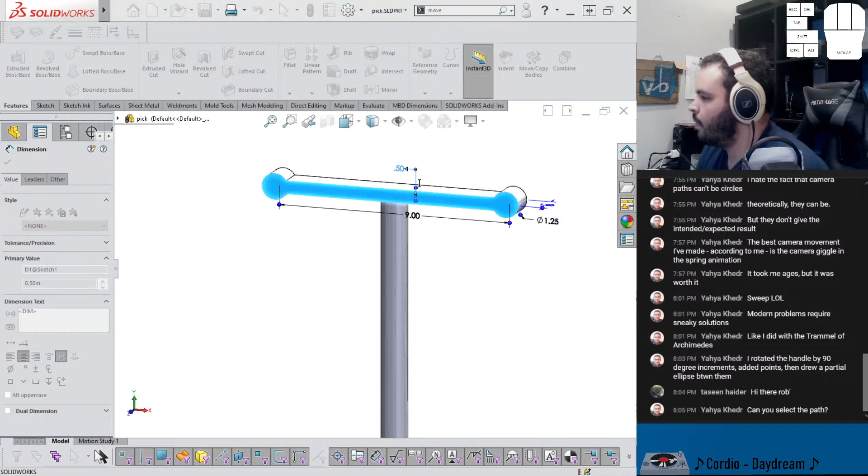Can you select the path? Not without exporting it to a curve.

There, now that's looking like something. So what I think I want to do, maybe we get it from this angle actually. I think that would look cool.

We're going to replace the key, the base we'll make transparent. Still looks kind of garbage. Shaded? No, I can't see it. Appearance. Advanced illumination.

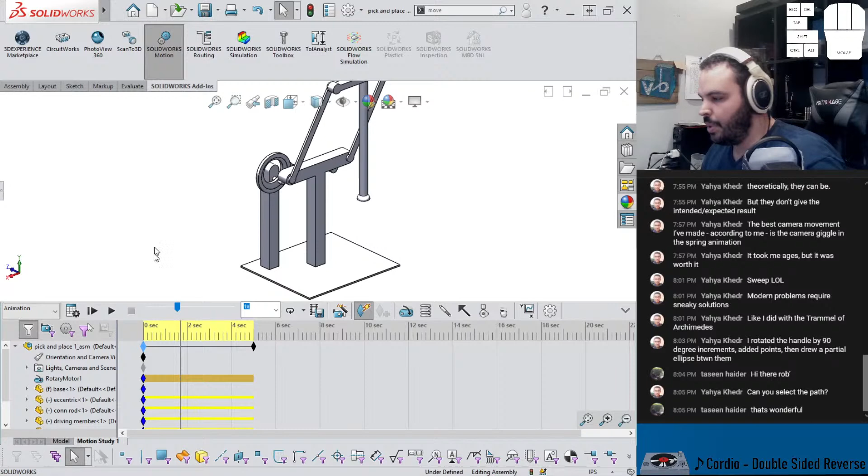Yeah, let's get some color coding. I might do the same color scheme that he had. Clipboard doesn't contain an image. Yep, that's because it doesn't.

Red, blue, yellow, let's do that, and I'll change that to purple.

Maybe a little bit from here. I like that actually.

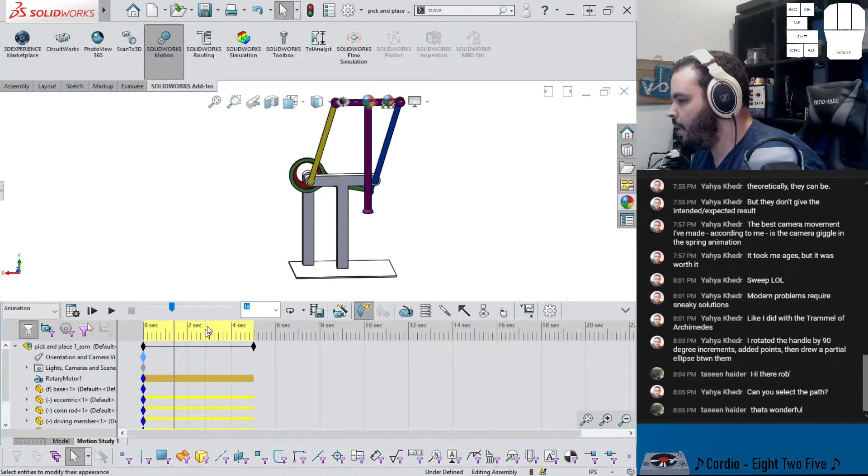I just need to zoom out just a tad. And that's pretty good, just a slight adjustment. Move that like this.

That's awesome. So what I think I'm gonna do, let me export this, and that'll be model of the day. And I want to keep playing around with this, because I have a couple more ideas that I want to do.

Oops, I don't want a new motor. I want to save this as AVI.

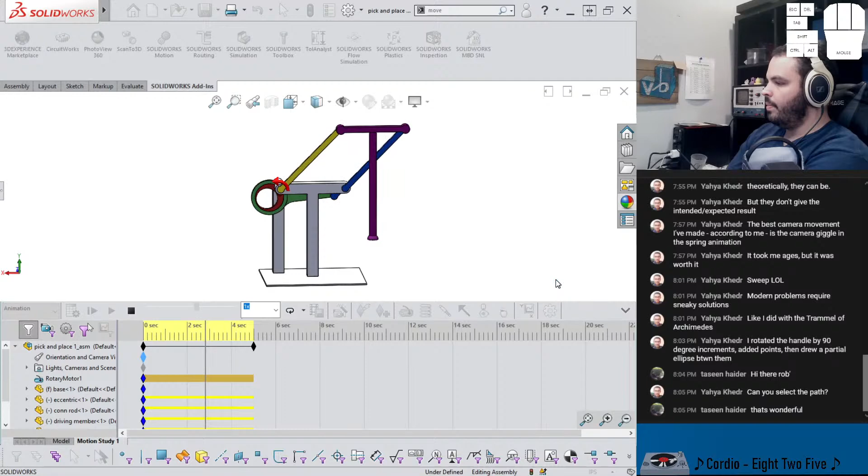Pick and place. Ding means it's done, let's just check that out. I really like the colors.

All right, fam, I think that looks pretty good. So we'll put that in our back pockets. But something I think would be pretty interesting. So what happens if I take this and I make this pretty short? What would happen? So if I make it like that.

Yes. Ooh. Might be a little too short.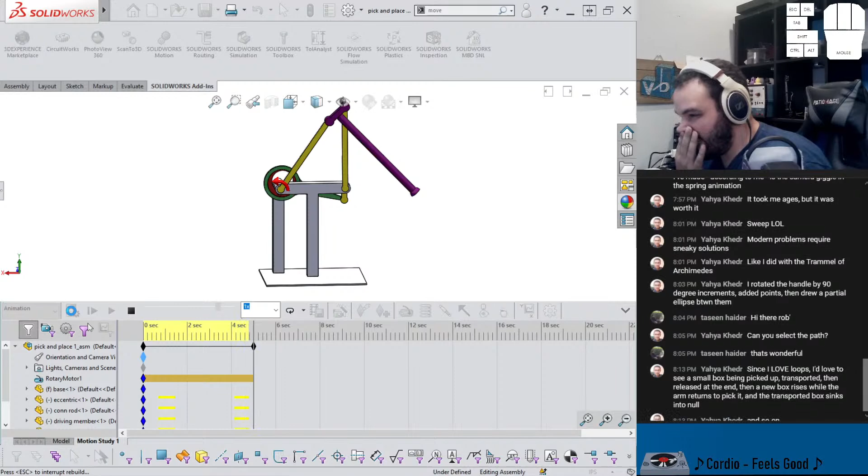Since I love loops, I'd love to see a small box being picked up, transported, then being released at the end. Then a new box rises. Oh, that's kind of cool. Yeah, so it looks like that's a little too short.

And I do have a box that we can use. Just exploring a little bit of my curiosity here. Oh, it reached a bad angle. So it can't be that eccentric, I don't think.

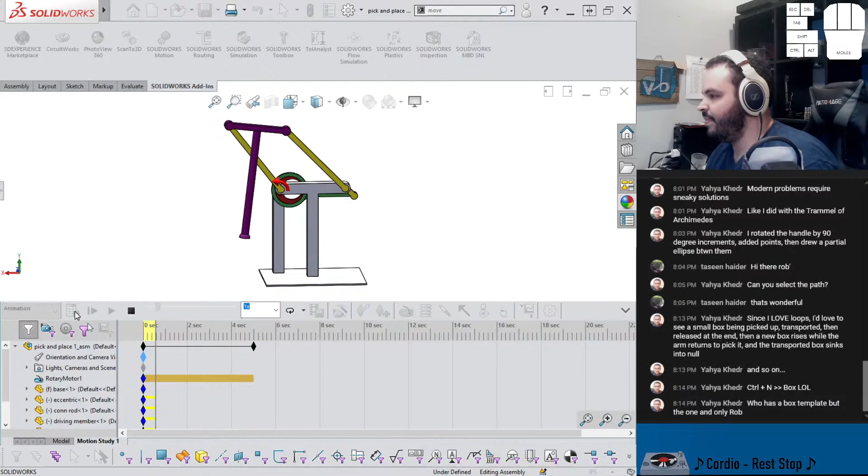So it looks like if you do make it slightly shorter, you can actually get it to grab at like a different angle.

Sorry, I was thinking of what Yahya was considering about, picking up a box loop.

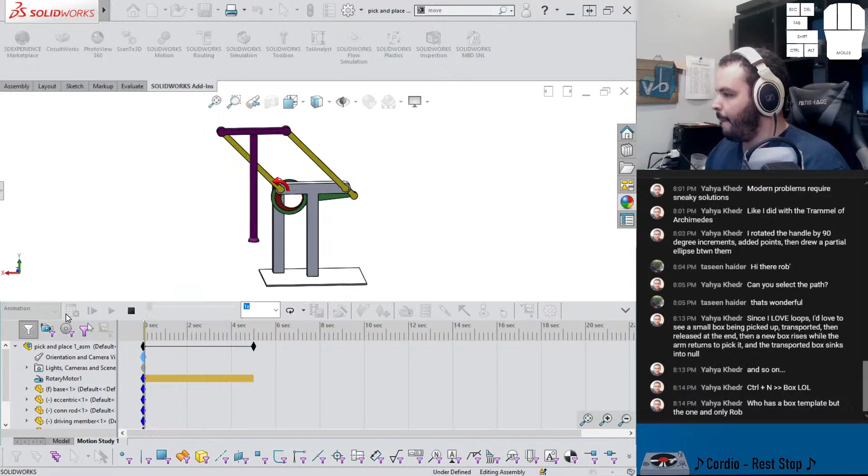So what I want to know is what is the approximate distance of this and that. This looks like a 5-inch, well actually 4 5/8 inch box.

There we go, open. This is the crate that I showed how to do in my Solidworks World presentation. Where's my... saved it rolled back for some reason.

And what I will do to it, I'll set this to be suppressed. And come on, my right clicks aren't working very well. Just set that to be 24, so take out the squish capabilities of it.

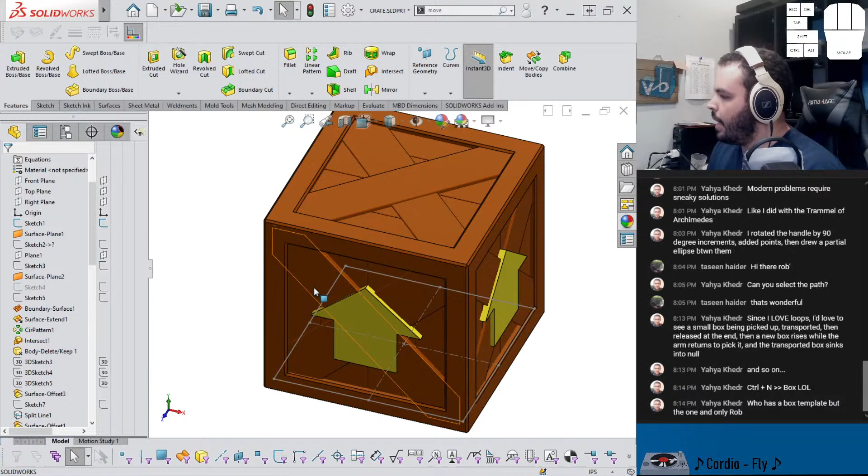Like that. And if I'm gonna do that, I can actually just combine all the bodies together, or at least most of them. I might just leave the yellow arrows separate so that they keep their color a little bit easier.

This and that. Wait, are there 4 of them? There are. I think I got all 4 of them.

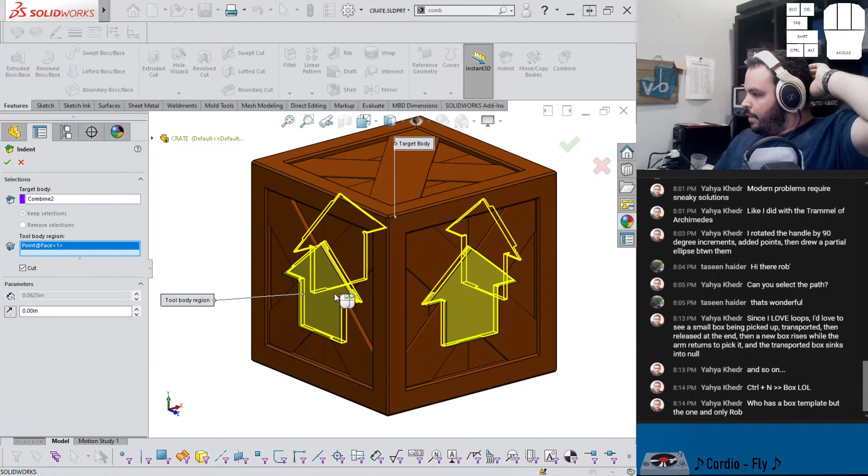And I can say indent that, cut with this. There you go, and now I can get hard lines.

And I think what I'll just do, keep it simple, we'll scale this and that about the origin, uniform scaling, 4.625 divided by 24.

Oh no, where did this box come from? I mean, yeah, fair.

Nice, adjust this combine if it can combine that. Is that just a boss extrude? Indent fails.

I'm glad that literally did not change anything. Intersect.

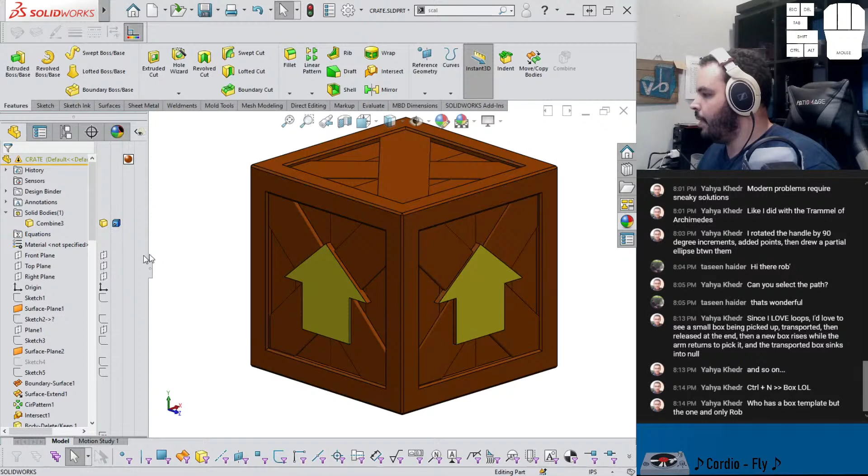That is super weird. Well, whatever. We'll just delete that body, get it out of here. It looks like I did combine the arrows, but that's okay.

So now we have a box. Oh, let me go back to...

Yeah, I'm trying to think how I can receive a box, carry it. I don't really want to mess with mates all that much. And there's your box.

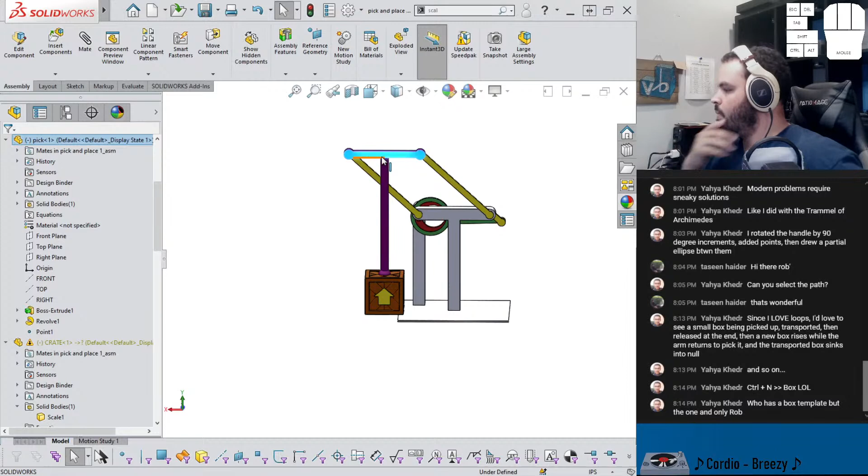Ah, it's intersecting too. Gross.

Honestly, I might just do this at a different time. I have a couple things I need to do tonight in my hometown anyway.

Yeah, that's the thing. When you have a daily project, you can't let it take up that much of your life. It's gotta stop somewhere, so I think I'm gonna call it as is.

I think it's a good idea. Definitely doable. Oh yeah. Been streaming for an hour and a half, so it's perfect timing, I think.